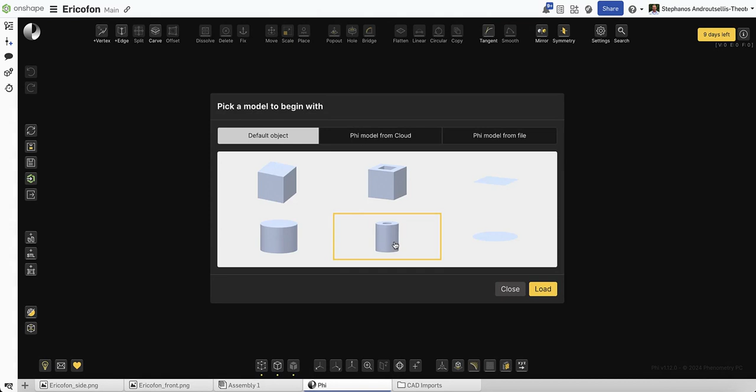We start by launching Phi from the plus menu, which loads after a few seconds. We bring in a cylinder, and we also give a file name for this model, Ericofon.

And then we bring in two images, a front image, and we give it a height of 10. And then a side image, and we give it again the same height. As you see, these are positioned centered on the screen, which is very convenient for now.

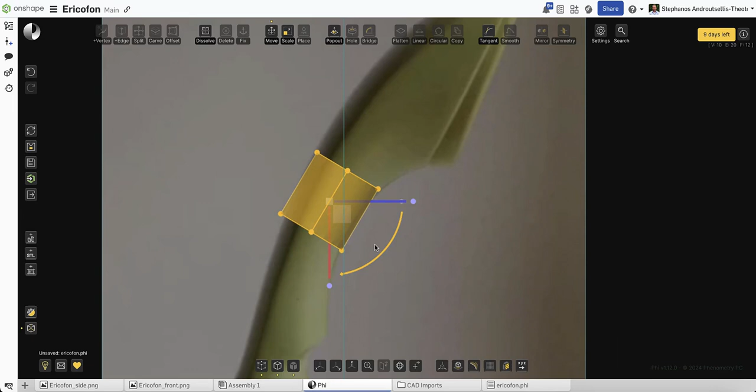And now we will go and work with our little cylinder. I rotate and position the cylinder, and I bring it further down at the beginning of the handle of this phone.

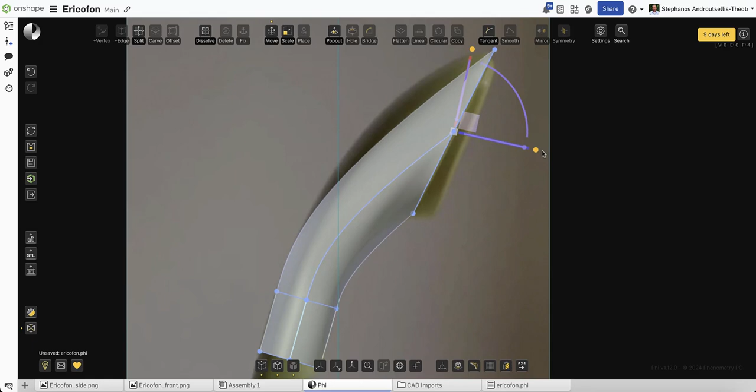I try to give it a good initial placement. And then I pop out the top face of the cylinder, which comes off tangentially, and I push the other side at the end of this handle. As you see, while I do my push and pull and modifications, the edges that come off of the face I'm working on gradually adapt. They auto-smoothen, but that's fine, we'll take care of this after a while.

So I try to very roughly outline the shape to start with, but we'll go back to that and fix it a bit later. And then I do the same on the opposite side.

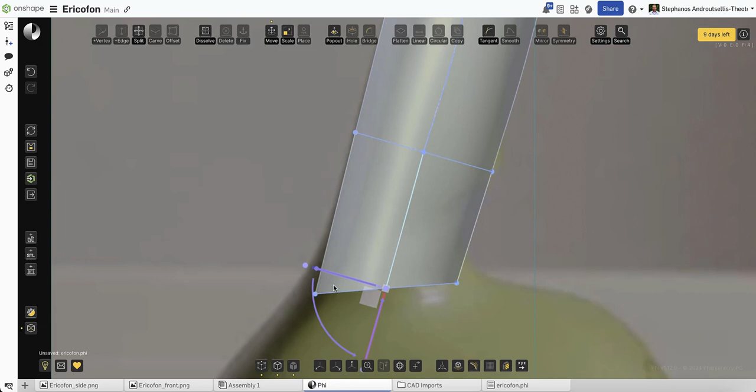I create an extrusion of the cylinder, and I add smoothness along the pairs of edges that come off on one side. Again, I try to capture very roughly the shape. And then again, one more pop out going down.

In this case, I will pull it and significantly enlarge the diameter of this roughly circular extrusion, and keep tracing the shape of this phone.

I add an extra vertex and I smoothen it so as to give the rounding that I want, and again smoothness on the rear side.

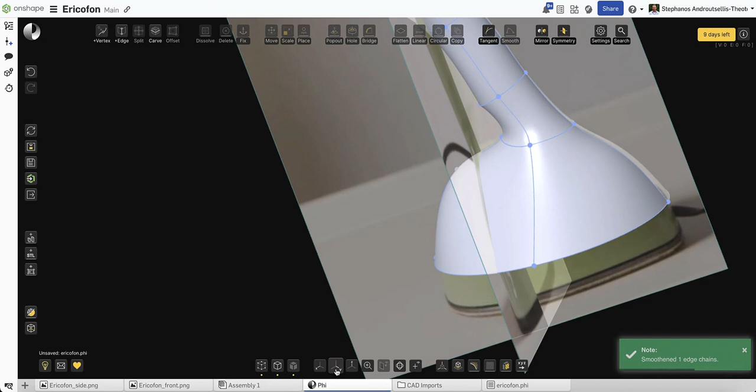As you see, sometimes when we apply a smoothness or we do some operation, the edges tend to auto-smoothen and become more straight, but we can go back and adjust them. Also the same in the opposite direction.

Now, I don't really worry about the perfection right now, because I will go in later and add symmetries everywhere, as you will see. I noticed that I need to enlarge the diameter around this loop.

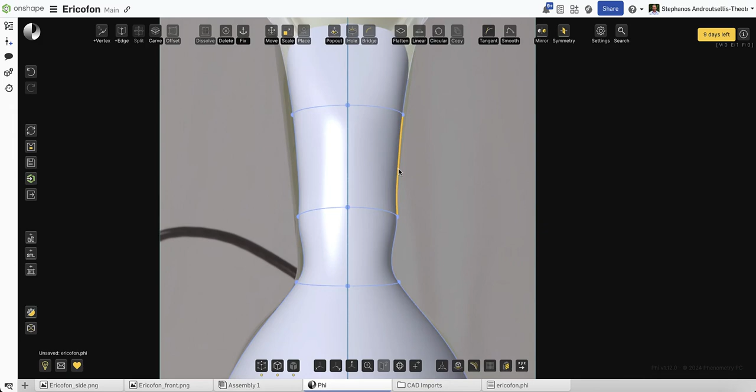We do a little bit of adjustment, and then we will also trace better the contour, and then we select pairs of edges and we do smoothen, so they're both smoothened together as one and the vertex moves in between.

And then I keep going downwards. At this point there is a discontinuity in our shape, which is a little hard to capture. But in the end we approximate it pretty well, and then you can always go in and move the vertices individually. It doesn't need to always be a rigid move of a surface.

And one last pop out going downwards to reach the end of the shape. Now, I don't really have a blueprint. I'm working off an image that is roughly orthogonal, so we'll do our best here. But it looks like we're okay on that side.

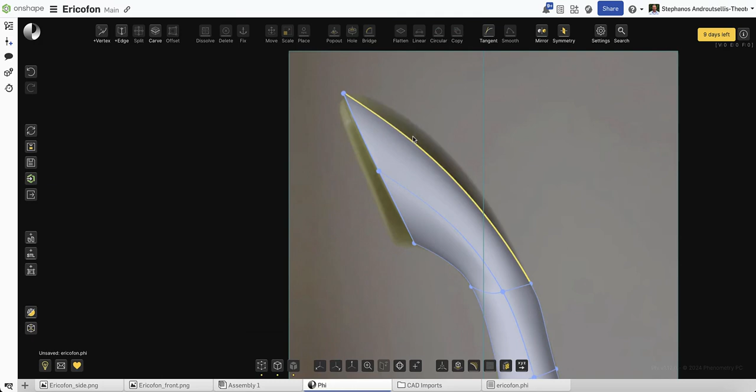Now a few fixes on the upper side of the shape. I do again some smoothen of 2 or 3 edges together to allow them to deform all together as one and capture an overall fair and smooth shape, as you see there.

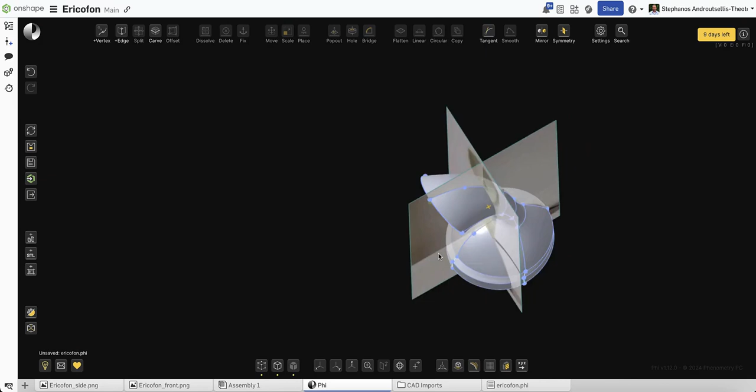Now at this point I will add on the top one more edge across the top of this handle, just to give it a little more roundness. So I add 2 edges and then I smoothen them together, which is something I do very often, so that they become continuous.

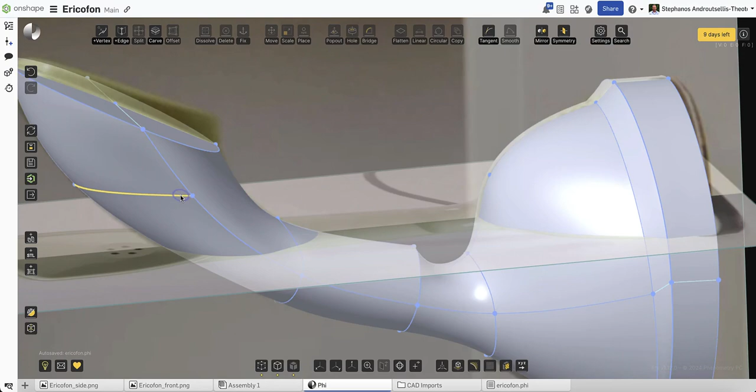And then I will go into tangent editing mode there, and I will add a tangency between the edge and the face that is across from it, on both sides, as you see here. So this is an operation that makes our edges be tangent to faces.

I will now add a symmetry to my entire model. So first I select a symmetry plane. I will now hide all the planes and in fact also the images to make it simpler to work. And then I select parts of my model and I hit the Add to Symmetry set.

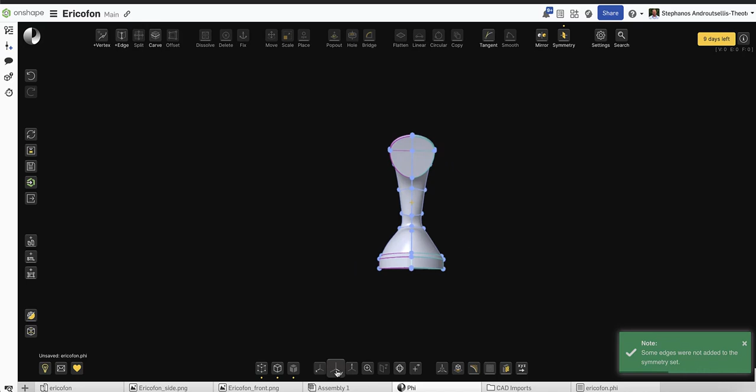So I gradually add a few edges at a time. I could in fact add everything at the same time, but sometimes there's some mismatch and it can give you unexpected results. So I feel a little safer going step by step. And then in the end I just add everything else all at once. So now I'm certain that my model is completely symmetric between the left and right side.

I think that this is relatively okay. As you see, I use the locked rotation to lock only horizontally or vertically, and I will send this over to Onshape.

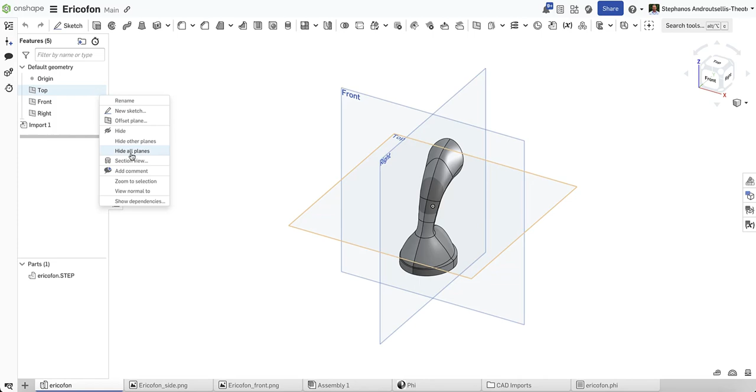So after a few moments, a new tab appears, and if I switch to it, I see my model translated into an Onshape Part Studio, as you see there. And in fact, I can go back to Phi and make some modifications.

So for example, here I think that I didn't capture this shape correctly, so I'm just editing it a little bit. And once I'm happy, I can send this back to Onshape, as I will do now, by simply clicking the same button once again.

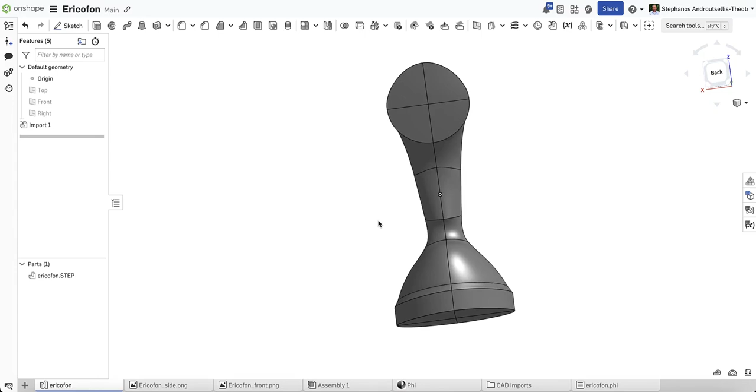And if I switch over to the Onshape tab, after a few moments, I will see, there you go, an automatic update of my design based on the changes I just did. And I can then go back to Phi, do some more work.

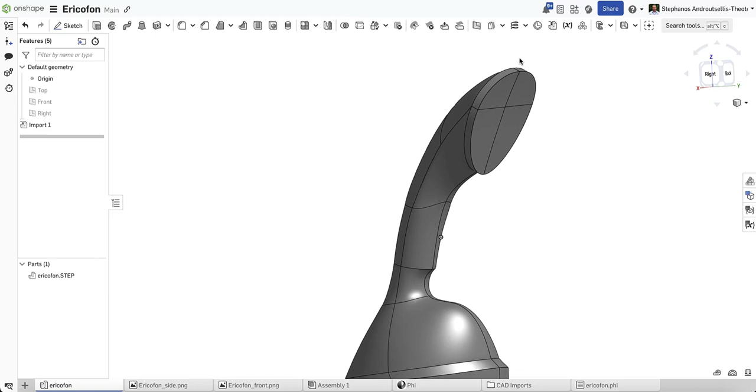For example, here I will do an extrusion to give some thickness to the top part of the phone, as you see, and then send it over to Onshape once again. And again, the update will appear in a few moments. And once I'm happy, I can continue with more downstream work, for example, adding fillets, as you see there, to my model, etc. So this is an example of how you can design with Phi and Onshape.